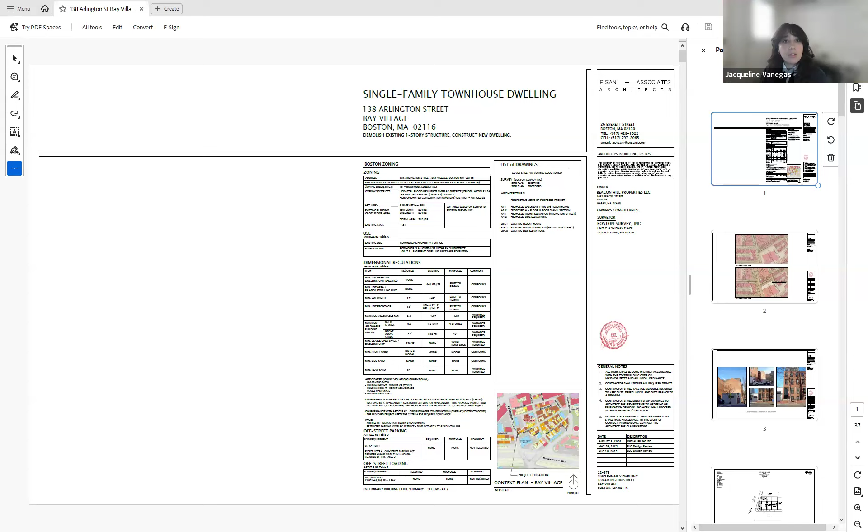Yes, Anthony Pisani, architect. First of all, I'd like to thank the commission, especially the staff. We've had a couple of meetings with them, and we find that their comments, recommendations, and suggestions were all very helpful. We feel that we've incorporated the majority of them, and it has made the project better.

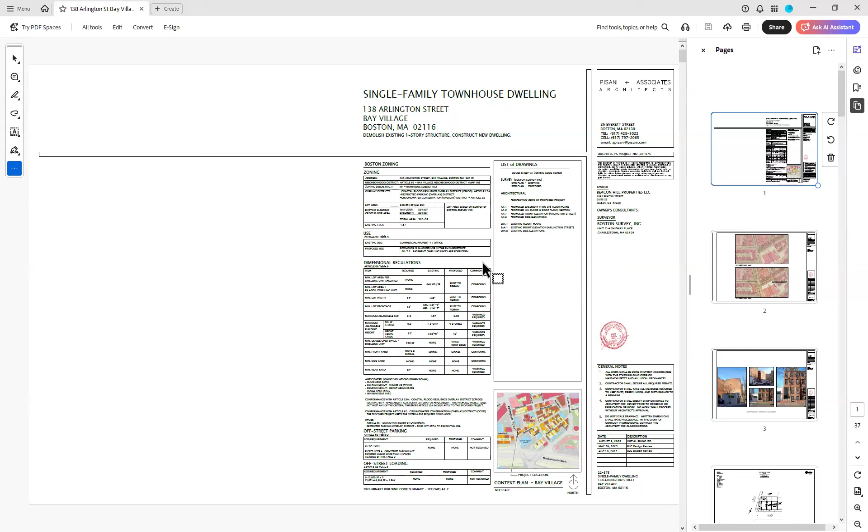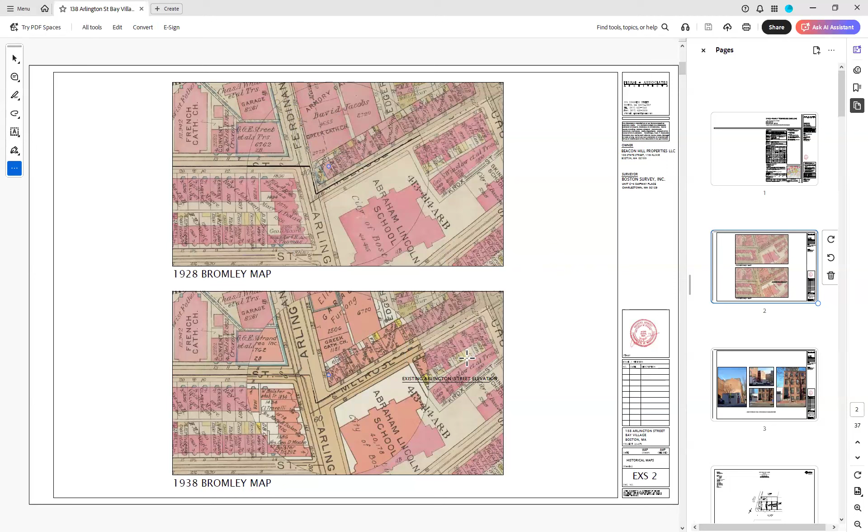The project is located at the corner of Melrose and Arlington Street, has the address of 138 Arlington, and it is a remnant site. The site is a remnant dating to the 30s, when it was known as Ferdinand Street, and there were buildings, two buildings, removed - numbers 64 and 66 - leaving this site. This is the existing condition that is here today.

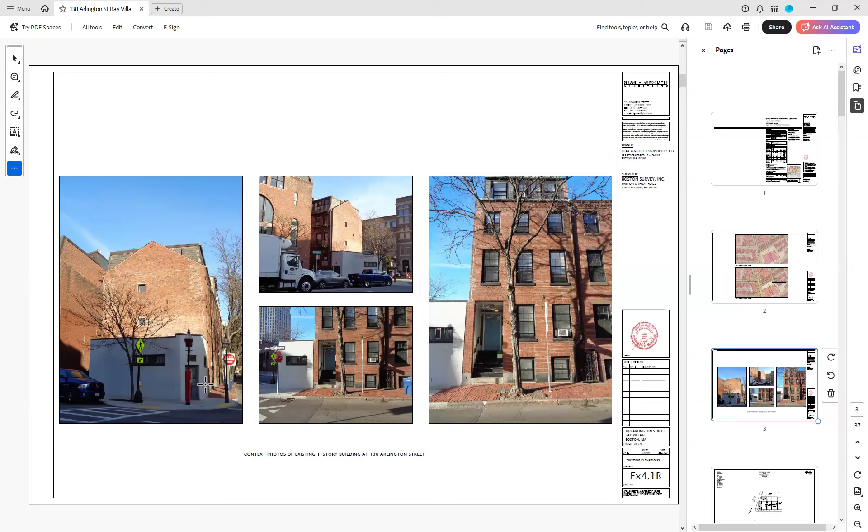Again, there were two buildings removed, and someone built a small one-story building, a wood frame building with stucco exterior. The area of the site is one of the smallest sites in the city. It is 368 square feet, has a dimension of 14 feet along Melrose, 43 feet along Arlington, and it goes from 14 feet wide here to basically zero. It's triangular in shape.

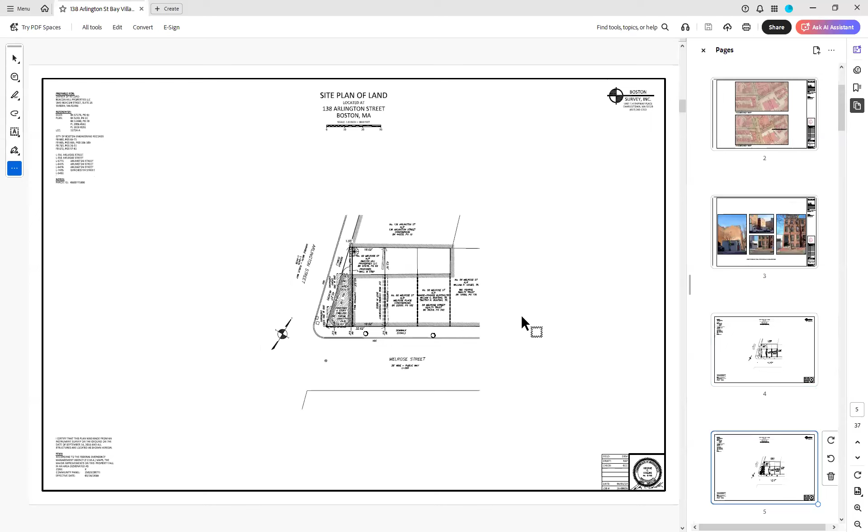This is the existing condition, number 62 Melrose, which is owned by the Cohen family. Our project consists of this building and this site.

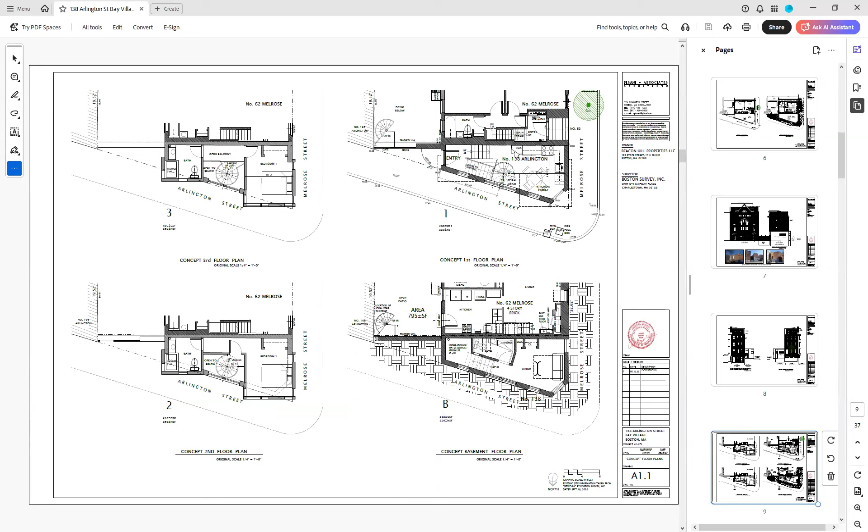Typical floor plans: we have a lower level, considered a basement, which would be a living room. You step up into the kitchen level on the next floor, then the floors following that, floors 3, 4, and 5, are bedrooms.

The section describes the project a little bit better. For the entry, we've gone through zoning, which granted us the ability to have an entry door that is not directly on Arlington Street.

There's a slightly lower level on Melrose, and there's a series of backyards at the lower level.

Up at the top floor, this is a diagram showing the top floor. Originally we had a deck that has been removed, and we've incorporated living space.

The area of each floor is roughly 270 square feet. The total area of the project gives us an FAR of 4.05. Total area of the project is 1,492 square feet.

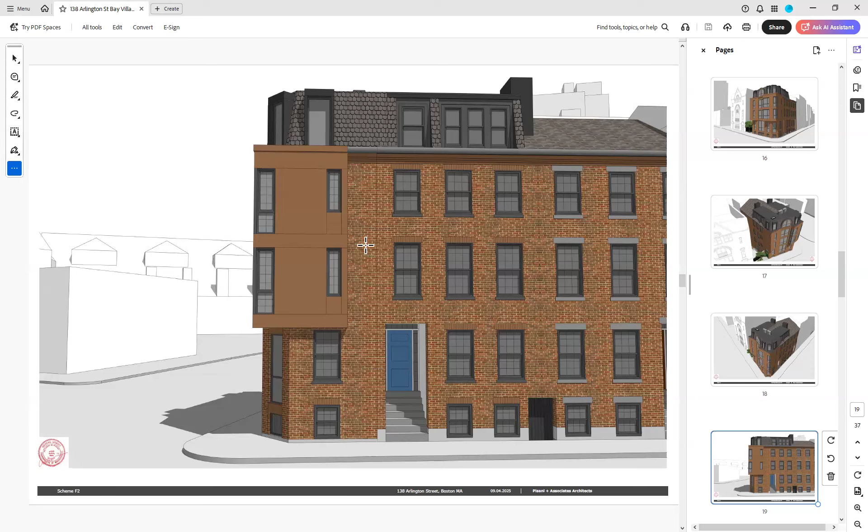The bay starts at a little projection of 6 inches here and starts to wrap around.

Again, the view from the previous scheme, and this is where we are today. The windows have all been modified to soften the elevation, I feel, by introducing very similar windows with muntins.

And we've always spec'd out and tend to use Marvins.

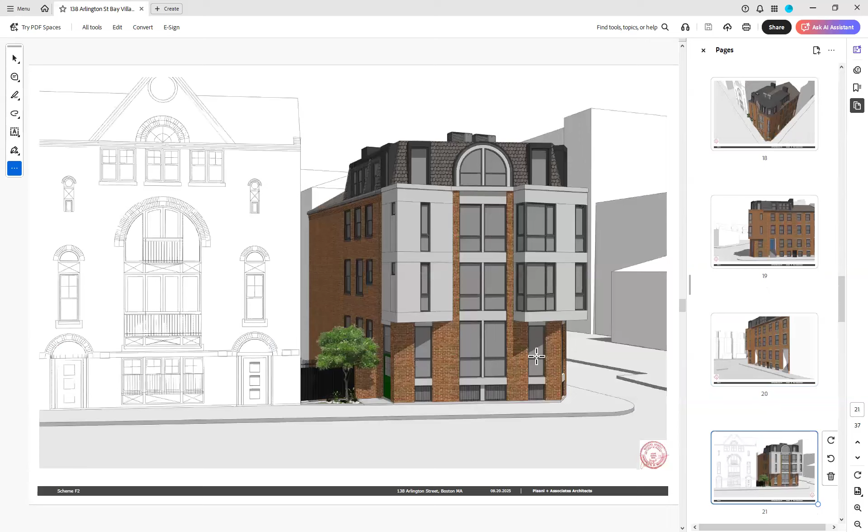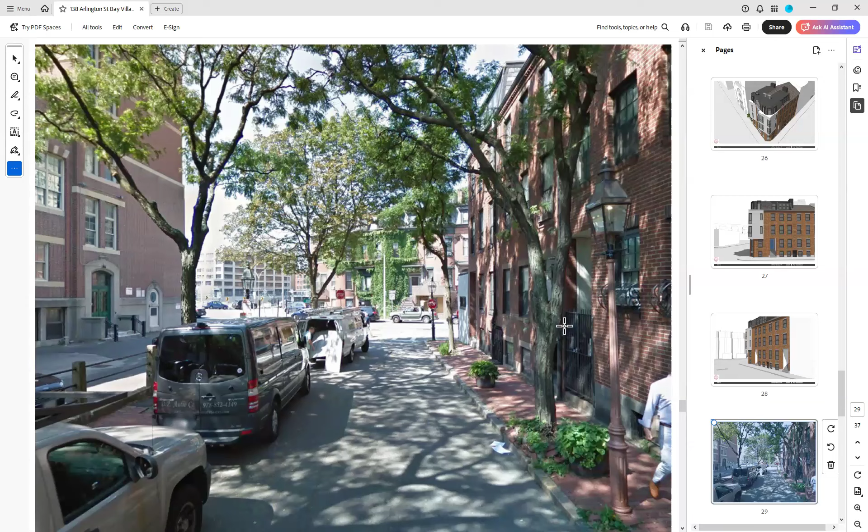And this is where we started. One of the interesting things about Melrose Street is that there are no bays. But as we approached Arlington, we felt the need for that. The purpose of the bays isn't just aesthetic—the major reason is we need the space.

Let me show you the plan here. What we call bays are really squaring off and making the rooms rectilinear. If we followed the line of the property, it would cut directly through. This allows a bathroom to work, and more importantly, a bedroom. The central portion is stairs—so it's basically bedroom, gallery, bathroom, stair.

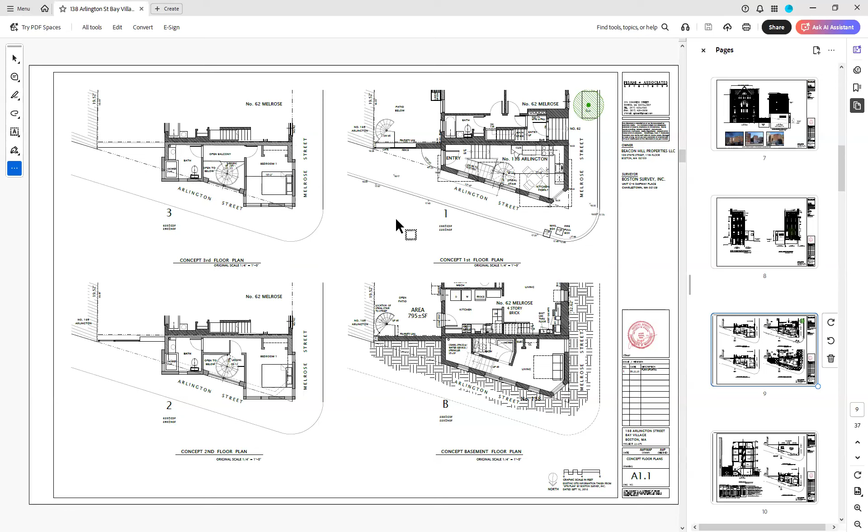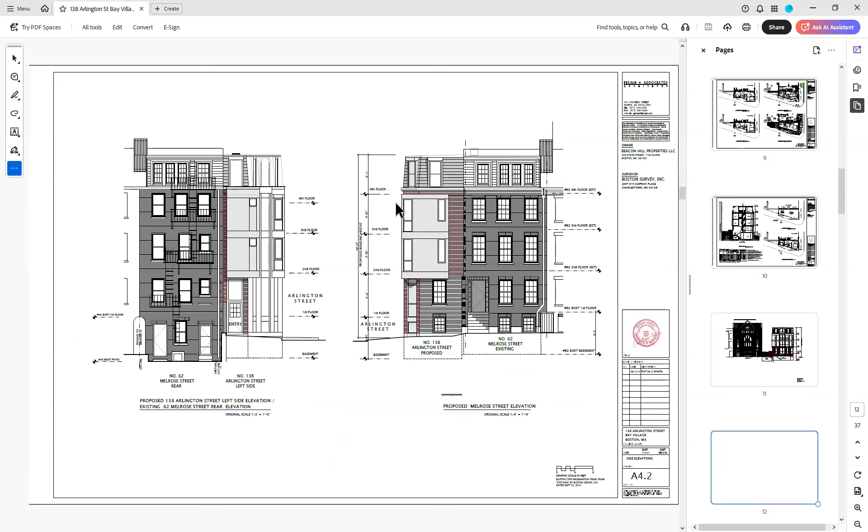You can see it here. One enters at grade, goes down to the living room area, up to the kitchen, and picks up the circular stair that runs up through the bedroom. And basically, that's it.

I have a question about the materials. On the lower level it's brick in the front, and then it goes up—what is that material on the facade, on the bays? It's copper.

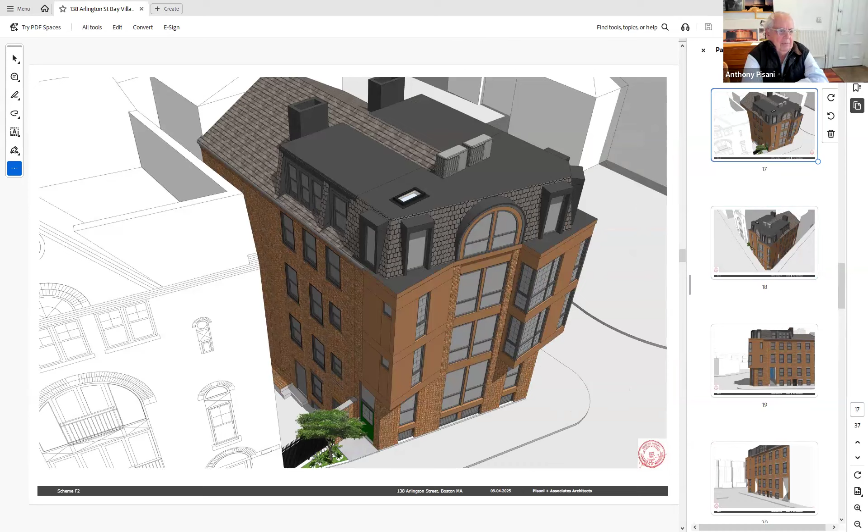We've done this on Congress Street, which is much closer to the water. We've put a treatment on so they go to a brown, almost a brown color. They don't go to green—not verdigris.

I think it looks pretty. I think your creativity really impressed me, because it's such a tiny spot.

I have a question about the entrances. Can you explain the entrance that's at grade on Arlington versus the entrance I'm seeing on Melrose?

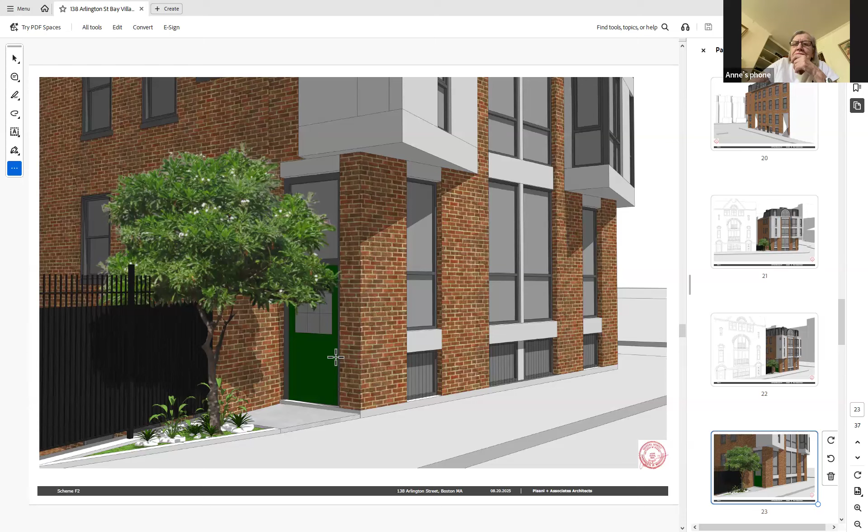In the existing building there are actually two entrances. One is here right now, and we are keeping that. We have removed the one on the corner of Arlington—it was right at the corner. We had to do that because of the level change.

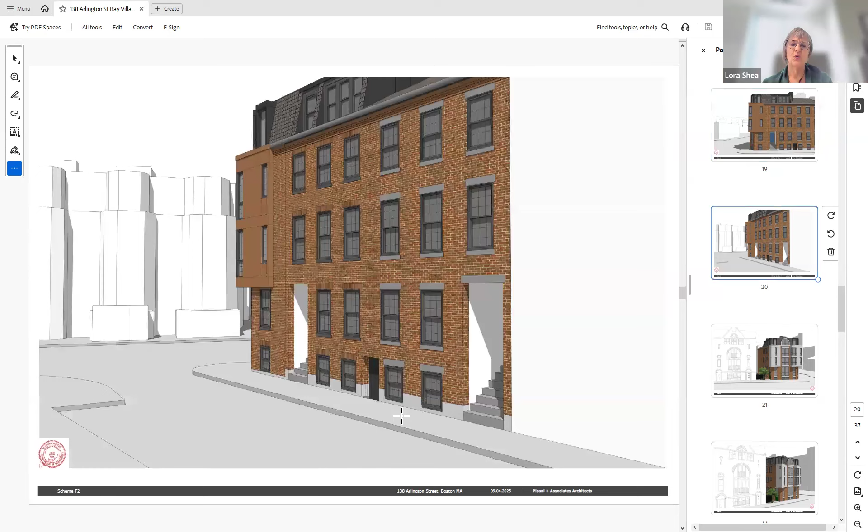Is there a second egress for the residents of the new building, an emergency egress below grade? There is one egress. We're a 1,492 square foot building, fully sprinklered, single family, and it qualifies for one egress.

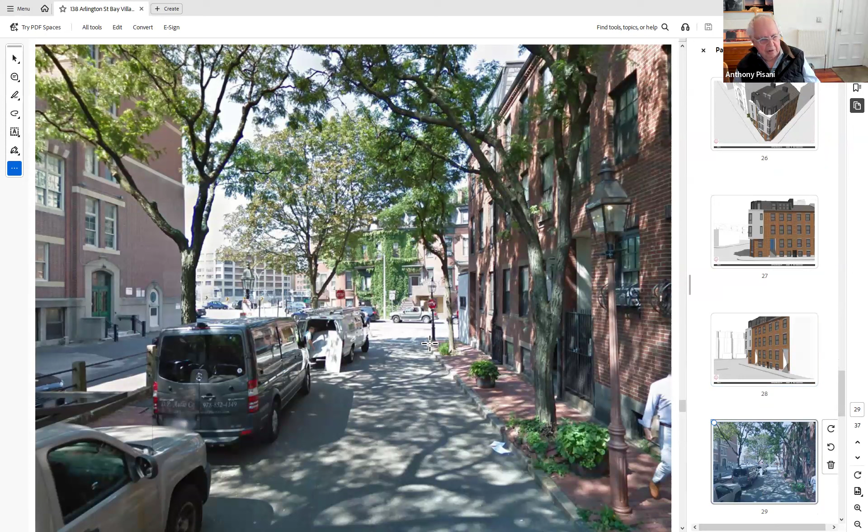So I live on Isabella and I have those lovely verdigris bays. When I come out my door and turn, I see your property. And last night I was noticing the two windows that currently exist.

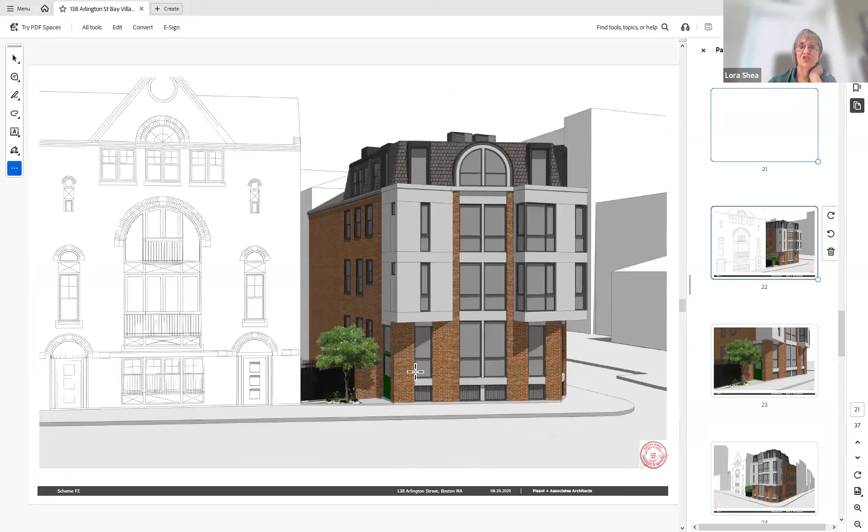If you go back to the existing conditions—here's the photograph. In the photo on the left, above the pedestrian sign, what happens to the light for the residents there?

That would actually be 62 Melrose. They get blocked. They are bathrooms, and technically they were put in illegally—those windows were not there in the original building. When they took the two buildings down, someone put those windows in.

The windows are on the property line. The only way you can have a window on the property line is if it has the same fire rating as the wall—that window would have to be a 3-hour rated window. Today that can be done, but in 1938, when they did that, it could not be done. So technically those are illegal windows, and they get blocked.

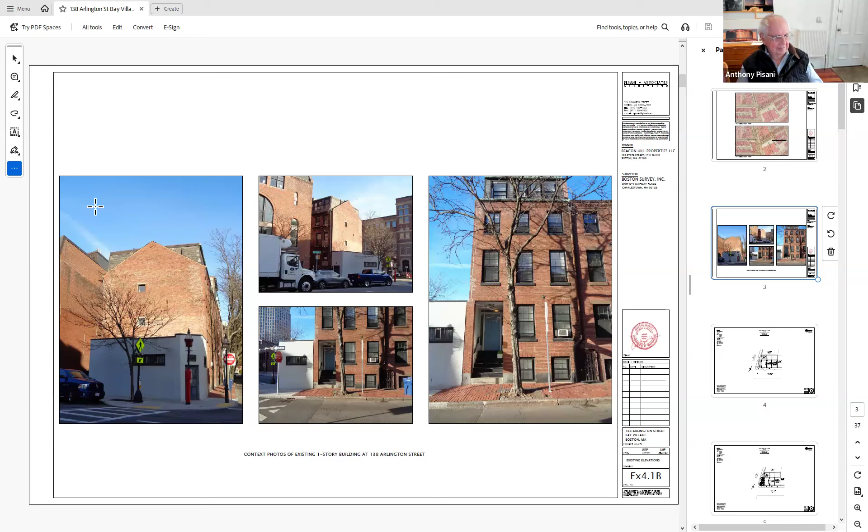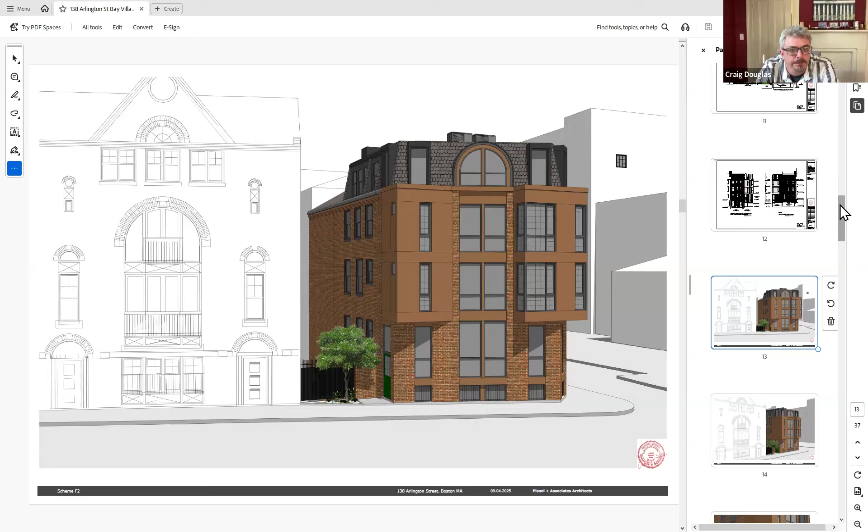I appreciate that the bay windows, with the way you're treating them with the copper, will be closer to the tone of the brick. I think aesthetically that helps a lot because they're a big feature. I completely understand why you need them from a floor plan standpoint, but I wanted to acknowledge that. I think that's a good improvement, and for the copper surface, I think that's great.

And lining up all of the windows with the abutters on Melrose, that looks really great.

Also, there are mullions in the windows. Do I see mullions? Yes. In all of them, or not under the arch? Let's go to the perspective of this. They are, but not in the middle, I believe. These all have mullions, as well as these.

And are the windows clear, or are they glazed for privacy, or both? They're clear glass, yes.

Even in the bathrooms? Good question. Well, one of the issues is that we have broken the bathroom windows. Obviously, what we'd prefer to do is a frosted, not a frosted, but maybe even a reflective glass. I'm not quite sure yet. I'm not worried about overviews for these two bathrooms, this one maybe a little bit, but we'll work on that, and maybe it's a gridded glass.

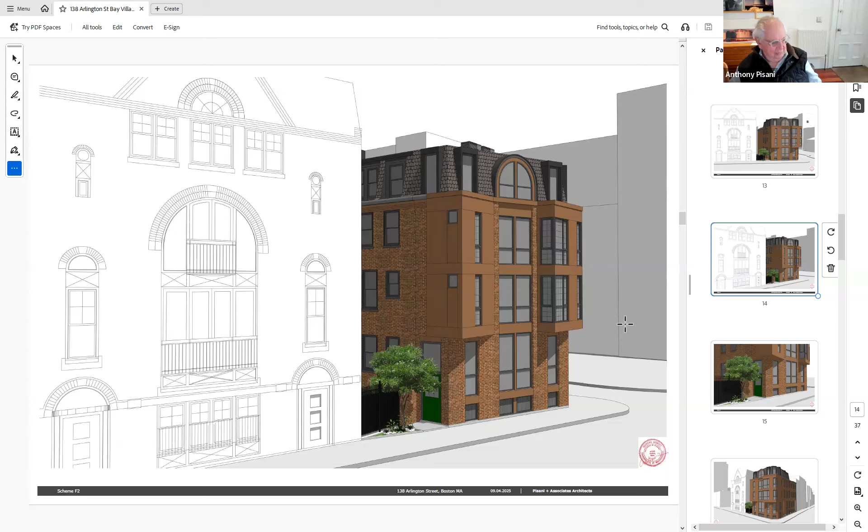Purposely, this building will have a reasonable level of excitement in the following sense: that's a circular stair, and this will always generally be very well lit, very transparent. There's a walkway that connects the bedroom to the bathroom, but that's further in and beyond the stair. I don't know what people's personal habits are going to be, but good luck to them.

I really appreciate the comments we got from Chelsea and Jackie and the rest of the staff. It brought us a lot; we appreciate you listening to them and modifying your design.

I'd like to follow up per the request of the commission to reiterate the staff comments, specifically that staff recommends this project be approved with provisos regarding the design of the new construction. Proviso one: the applicant will work with staff regarding the finalized material and design of the bay windows. Proviso two: the applicant will provide an on-site mock-up of the mechanicals for staff to determine appropriateness of its location in relation to visibility. Proviso three: the applicant will provide an on-site mock-up of proposed cladding materials.

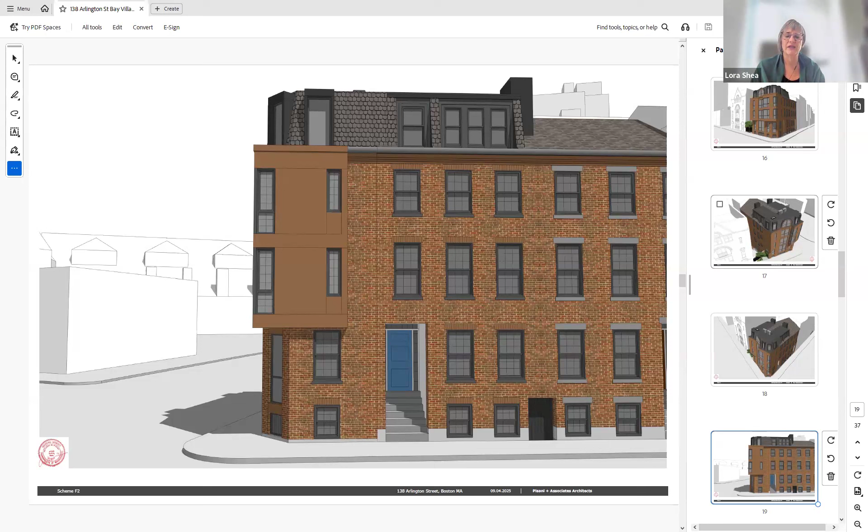A question about the proviso for the mechanicals: are the mechanicals only on the rooftop as shown in your schematic here? Are there mechanicals down in the backyard and below-grade area, or are all the mechanicals on the roof? We're showing all the mechanicals on the roof.

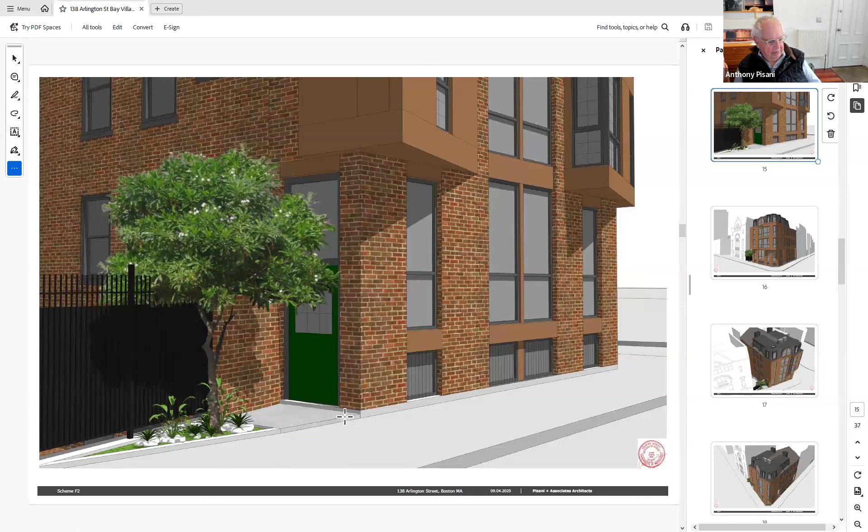I'd like to follow up and confirm that the proviso was based on our communication with the applicants, that the on-site mock-up of the mechanicals would be placed on the roof.

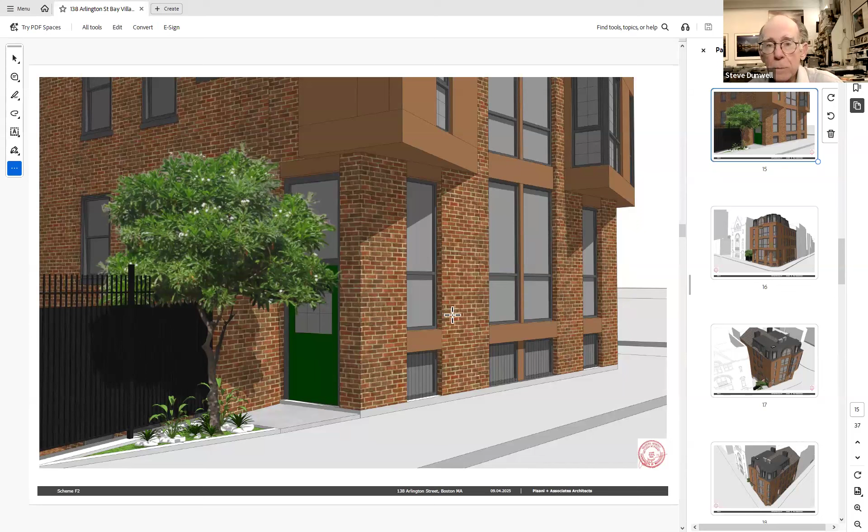Steve, you had a question? Yeah, I just wanted to echo what Ann was saying. I also wasn't able to fully attend the previous meeting, though I listened to part of it. I think this looks like a really great improvement, and I like the details. You guys have made some magic happen in a very small space, and I am ready to move to approve it with the provisos that have been mentioned.

So I'll second that. Is there other comment on this, by the way? Yes, I would like to make a comment. And Jackie, it looks like...

The transition from John sending Zoom links didn't work for me. John has spoiled us by sending it just before the meeting, I must admit. Long weekend notwithstanding. So that was not a comment on this property, that was a comment on my joining 5 minutes into the call.

I believe, based on the very detailed presentation last month, this is truly, to echo everybody's sentiments, a great addition and value in a historical way with a modern twist to the neighborhood, and only adds to this stretch of Arlington Street to make it even more beautiful and family friendly. So I commend everyone. Thank you, and probably that's a creativity and something the neighborhood can learn for any future developments, that sort of historical do-over of either open spaces or upgrades or any build-ups, assuming there would be any, since this truly, I believe, meets the 21st century with the 19th century spirit of the Bay Village area. Thank you.

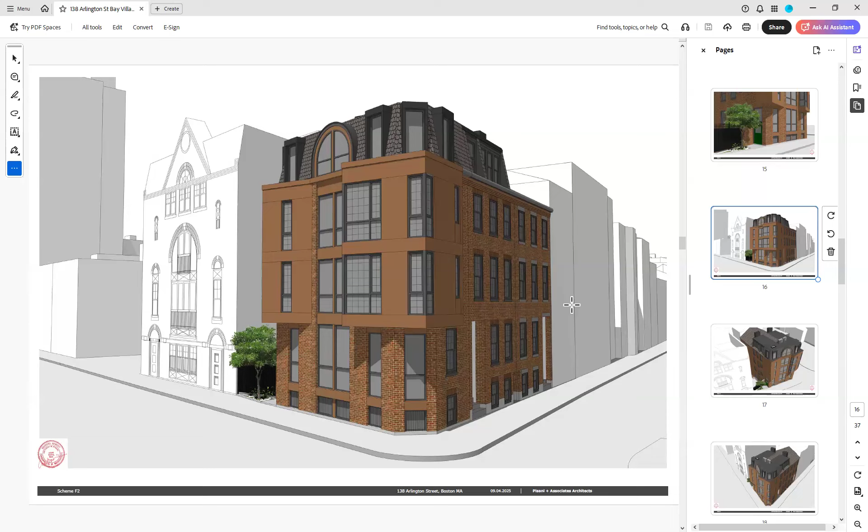All right, so Steve, I think we'll have to check if there's any public comment. Yeah, let's ask for that. Is there a public comment?

Let me, Anthony, if you may please unshare your screen, so I could share, and then that will allow me... So Steve, if you see the screen. You want me to read that out loud?

Yes, please. Members of the public will now have an opportunity to ask questions and provide public comment on the application and the discussions. To do so, please raise your hand via the Zoom meeting platform. If you are calling in and cannot use the platform, you can press star 9 to raise your hand, or you can send questions to the staff via email at bayvillageac@boston.gov.

Okay, so I currently do not see any raised hands, and checking the email inbox, we do not have any public comment.

Okay, seeing no comment, is it appropriate now to ask for a vote on this? Is that okay with you, Jackie? Yeah.

So may I propose, I'm going to propose the motion. I propose that we approve this application as presented with the following provisos. Number one, that the bay window design be reviewed by staff as was proposed. Number two, that there be a mock-up showing the roof mechanicals to confirm that the mechanicals are set back. And the third is a mock-up of the cladding material, which we believe is copper that will age to a brown color.